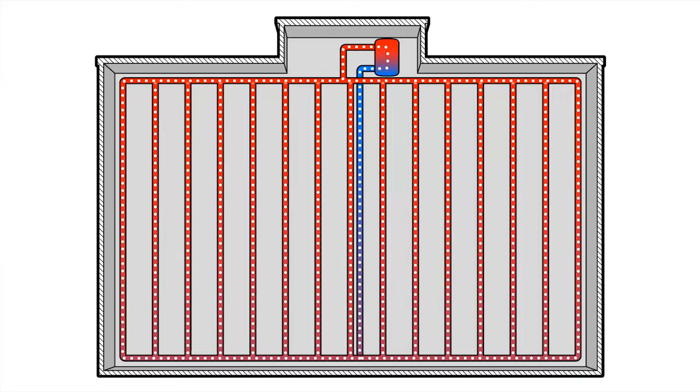Sure, okay. So this was the recirculating system that I was trying to explain. This is a typical building layout where the hot water up top is the tank, and the hot water distributes on a main header on the top floor, then goes down and feeds all the units, kitchens and bathrooms. At the end, on the lower floor, the hot water collects again and gets pulled back up into the boiler room where it gets reheated and sent on the way. So you can see this is a circle, and the water is constantly moving.

The problem with that is especially the smaller diameter pipes. A building has bigger pipes on top, and as the riser goes down further it gets smaller. The smaller diameter pipe is where the pinholes usually start. The reason is the same volume of water has to go through a half-inch pipe as goes through the top, so the velocity is much higher on a small diameter pipe than in big ones. That said, the erosion only starts on the smaller pipes, but it keeps going up.

If you keep waiting and keep patching the pinhole leaks, you will run into more issues along the way. The pinholes start getting bigger faster just because the wall thickness of the pipe is constantly decreasing, to a point where, technically, we've seen it before, you could pinch the pipe with your thumb. So this is the recirculating system.

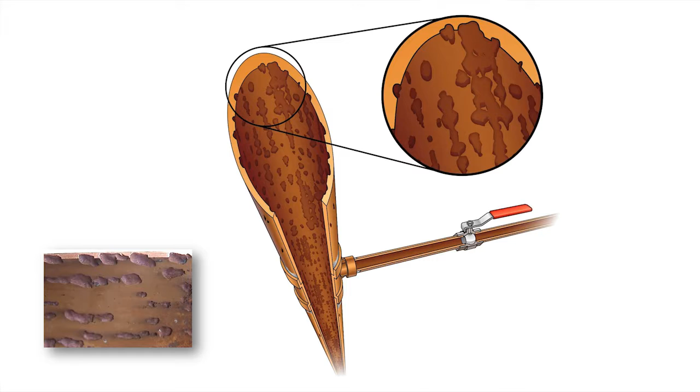And this is the pitting that I was talking about. This is how erosion looks like. We have pipe samples outside also that you can take a look at. It's not even erosion — water creates turbulence within the pipe, so some areas are affected more than others.

This is the velocity of the water, and also poor workmanship in some cases, which also affects the cold water.

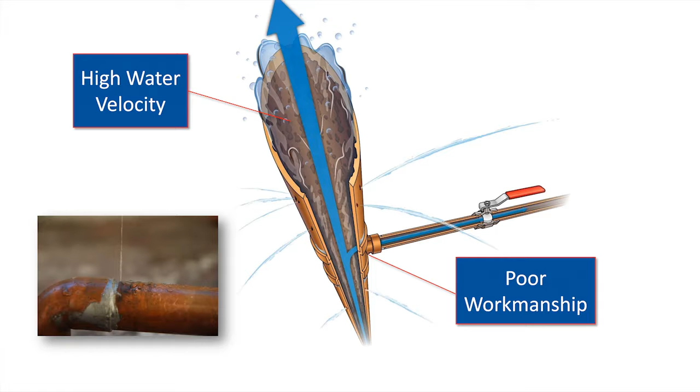If something is being soldered, a connection, you need acid in order for the solder process to work properly. This acid has to usually be wiped off. Sometimes it doesn't get wiped off, so it stays there, and since it is an acid, it corrodes the pipe from outside in. So poor workmanship is also a factor.

It's not as bad as the velocity of the pipe. That's the major cause number one for pinhole leaks.

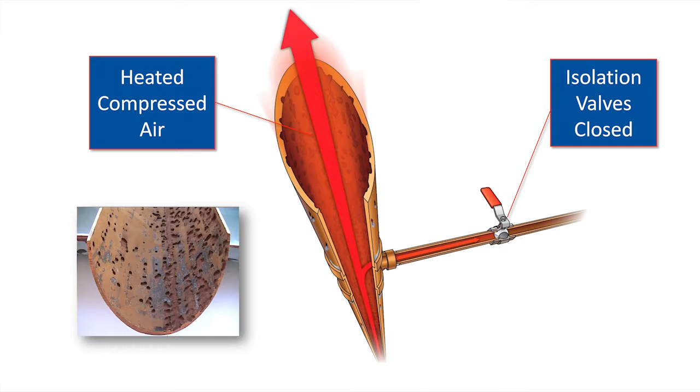This is the process created. Here you see the hot compressed air, how we clean the pipes and how the pipe is being heated up for the process. The epoxy needs a certain temperature to react properly.

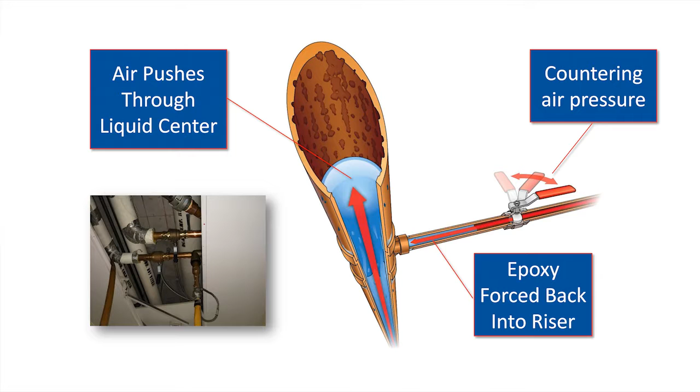Then the air is pushed through the pipe, always going from the small diameter to the big diameter where the epoxy is applied. The epoxy gets pushed through on one end, on the bottom in this case, until it comes out on the top. That way it's ensured that everything is 100% coated.

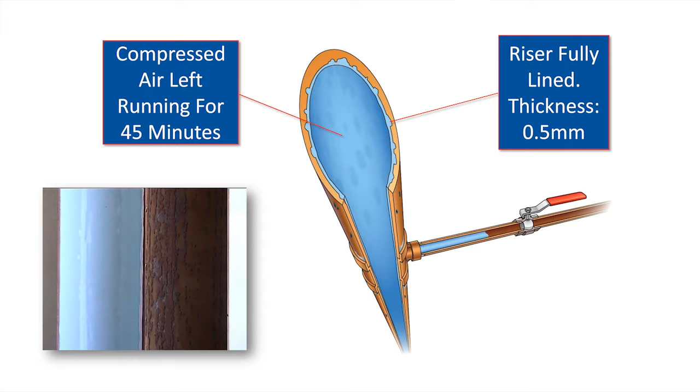After the coating is done, there's a 45 minute running time to make sure the epoxy is tacky enough to stick without any air. Then the air is shut off, and the next morning the water is turned on, and you have a new pipe within the old pipe.

The warranty, compared to a new copper pipe, is much longer. The warranty for lined pipes is 25 years. With new copper pipe, you get probably like 2 years maybe.

There are issues when there are, for example, galvanized pipes in some buildings, really old buildings. Those pipes need to be replaced. Lining just doesn't make sense. It would cost too much because galvanized pipes start rusting.

In order to get the rust out, it takes double the amount of time than it would to line copper pipes. So I would always suggest 100% that if there is rust in the pipe, if you have rusty pipes, if you have galvanized pipes, they need to be replaced into copper pipes. Or these days, PEX pipes, plastic pipes, are big as well, and the warranty is much better too.

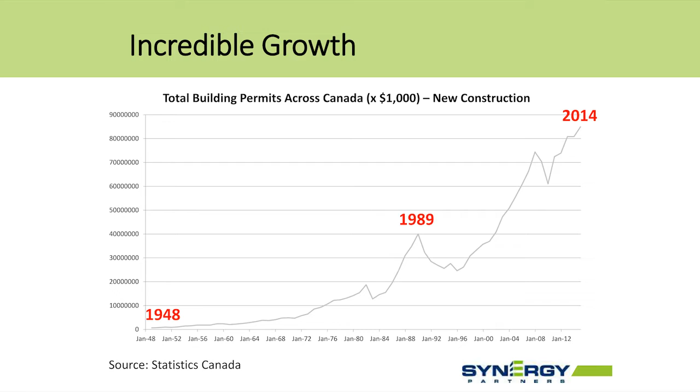Not only the stuff turning 25, but the older stuff where we're starting to run into problems which we really haven't seen as part of the mainstay of building repairs. There's your roofing, plumbing work, boilers, all that regular stuff. But then there's another whole group of things that are going to need to be done to these older buildings. So keep that in the back of your mind as we go through the presentation.

A couple of the deterioration mechanisms we're going to really focus on today are corrosion and freeze-thaw. There's obviously a whole slew of mechanisms in which a building or building components can fail and deteriorate, but we're going to focus on these first two: corrosion and freeze-thaw.

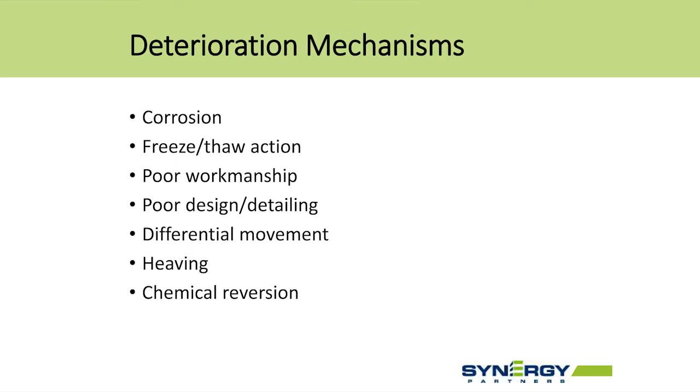One of the premises you just have to keep in the back of your mind - I think everybody knows this - is that steel rusts. I know it's not terribly new to you, but it's a phenomenon we have to deal with on a daily basis. There's a whole chemical process, but basically you need iron, water, and oxygen to cause rust - going back to high school chemistry, if you will.

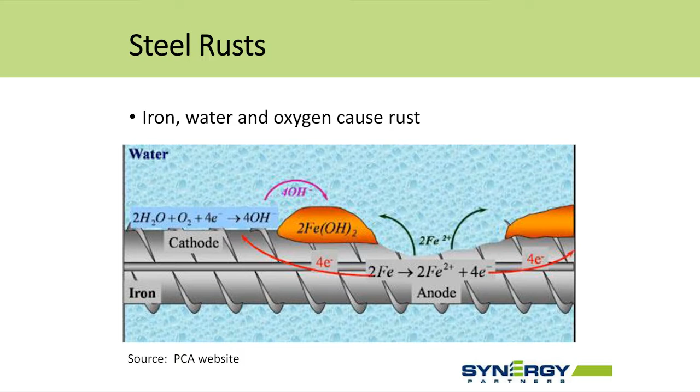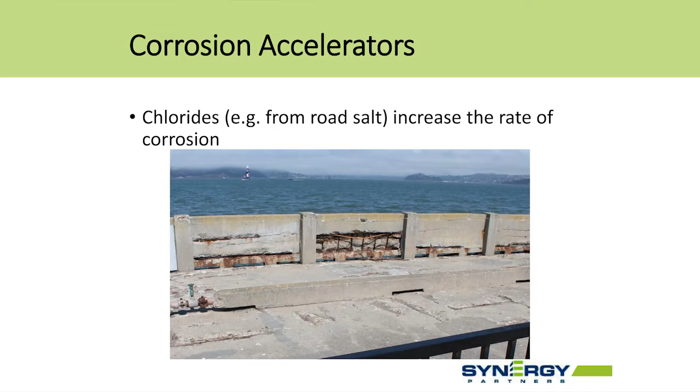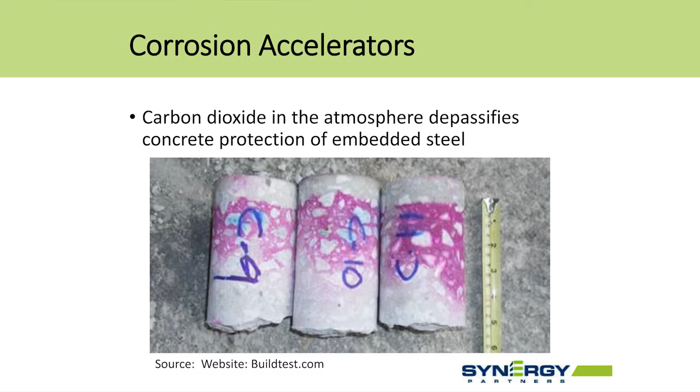Another process that you might not be so familiar with is something called carbonation. This is where carbon dioxide within our atmosphere can get into concrete and depassify the natural protective cover that concrete provides on steel, causing corrosion as well. Now that's a little bit more complicated.

There's a lot of debate in the industry about how effective or how important this is and how relevant it is to the degree of corrosion. But our experience has obviously been that carbon dioxide does cause steel to become depassified in concrete.

So what that means is that the steel within concrete is naturally protected. I don't know if most people know that, but the inherent alkalinity of the concrete protects the steel. As soon as you turn the alkalinity to more of an acidic environment, which carbon dioxide does, it corrodes. It causes the embedded steel to corrode. That's a very important phenomenon that we need to be aware of.

One of the results of corrosion is obviously a loss of structural capacity. You're starting to lose section loss. But another interesting fact is that steel expands and increases in volume by about 10 times. That expansive rust formation, as it's growing, can impart loads on the structure that were totally not intended. Engineers are not designing for steel that's going to corrode.

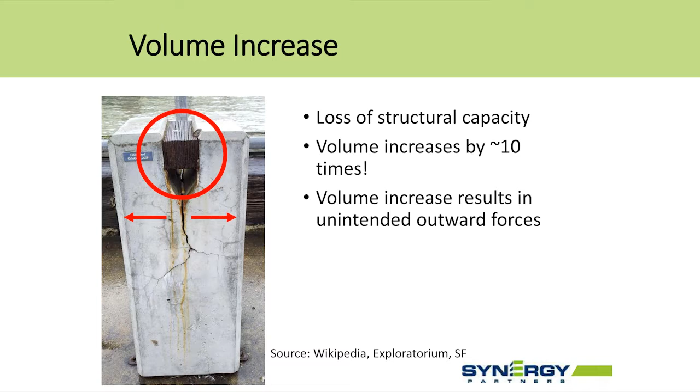They're designing for the steel as if it's going to be maintained. So it can have all sorts of effects on the building structure.

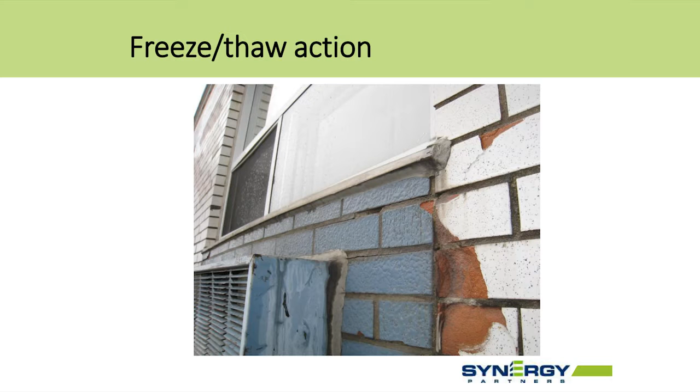And then freeze-thaw action. In this northern American environment, we have freezing temperatures and warm temperatures, and that constant freeze-thaw cycle leads to some fairly significant deterioration. We've all seen some brick spalling and mortar joint deterioration as well.

So that's just trying to give you a little bit of a backdrop so that we can move into some examples now to show you some specifics on buildings that I've had the opportunity of working on.

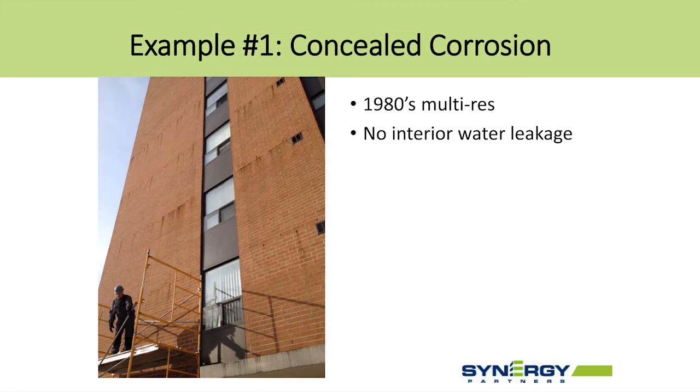So the first example here is a 1980s multi-res building, with no indications of water leakage on the interior. Nothing more than the staining that can be seen at the floor slab levels. This is actually rust staining coming out from the floor slabs, and it's very easy to walk past this.

Subsequent to a review, it was recommended to do some further investigation and some openings in the walls. What you find after doing some openings is that the embedded steel shelf angles are in fact corroded, to the point where they are starting to lose structural capacity.

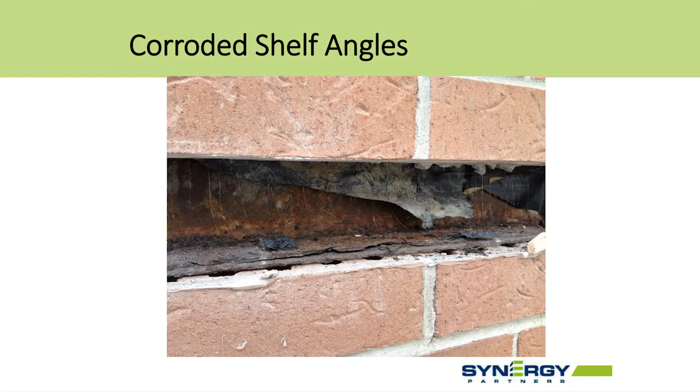If I just go back to this photo, the design of this wall structure is such that these panels are supposed to be individually supported. Each brick panel is supposed to be supported by a shelf angle, and then the next panel down is supported by a shelf angle, and the next panel down is supported by a shelf angle.

But as soon as you start to lose structural load-bearing capacity on those shelf angles, all of these bricks start to load up and stack. All of a sudden you get unintended loads coming down. So all the loads being taken by this bottom panel are significantly increased, because now it's starting to support loads from upper panels.

So it's very important to make sure that doesn't happen. If you start to get those stacking effects or loads being compounded within your wall assembly, you will have other issues such as cracking, spalling. You can have brick panels that start to bow and come loose. It's important to get that looked at.

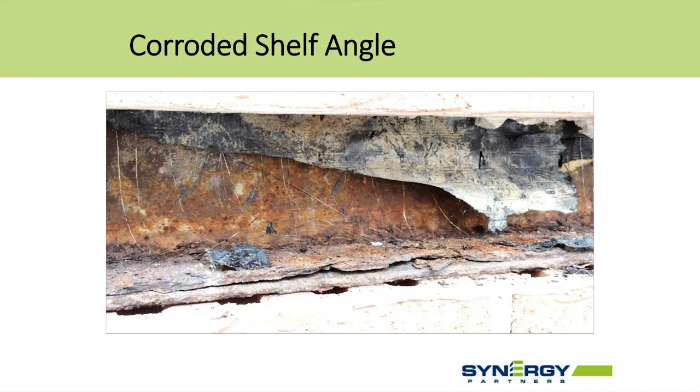I just got a slightly better picture of the amount of corrosion that's happening within this wall assembly, and it is fairly significant. So, what's the solution there for that building?

Well, the first thing to do is to check to see whether there's a stacking effect going on with the brick panels. If that's the case, then you have to be very careful in relieving those loads. You want to return the loads back to the shelf angles. In order to do that, in some cases, you'll have to replace shelf angles. In other cases, if the corrosion is not that bad and there's still enough structural strength within the shelf angle, it can be cleaned.

So it can be cleaned. Ultimately, those walls are designed for water to get past the brick, so you want to provide a mechanism for that water to get out. At the bottom, you want to protect that shelf angle and allow the water to get out, instead of sitting

on the steel shelf angle and corroding. But if they're corroded past their structural capacity, you're going to have to replace them. Yeah.

You do it in sections, yes, and you shore up the panel. I'll add, it's an expensive process. We have one in Halifax that's underway, starting in a couple of years, and it's about $400,000 to do all the shelf angles for the whole building. So quite an expensive process. You start at the top and you work your way down, relieving the load on the bottom panels.

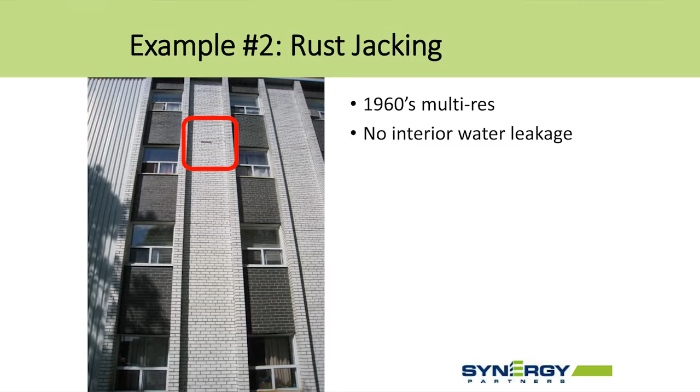Good. Okay, let's move on to a second example here. This is a 1960s multi-res building. Similar situation where there's no really apparent issues. Walking around the outside of the building, you really don't see a lot. There's one brick spall, no reports of leakage. And when you start to take a closer look at the upper floors in this same building, there's rust jacking going on.

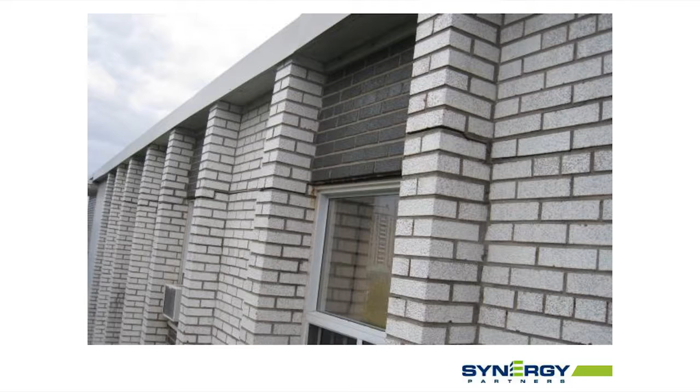As I said, when steel corrodes, it expands in volume and can cause a jacking effect, imparting an expansive load. In this case, there's a shelf angle running along here, and it is corroded to the point where it is jacking up the walls above it. This hasn't been opened up and investigated as yet, but there's definitely something going on that's concealed there. It needs to be opened up, check the load, check the condition of the steel shelf angle, and then make a determination on the repair, whether the shelf angle can be cleaned.

In this case, I doubt it. It's probably going to need to be replaced. There's also going to be significant brick removal needed to access that shelf angle and restore that wall back to a vertical plane.

This is another example of an elevation on the same building, a different wall area, but similar. Water is obviously getting into these shelf angles and causing them to corrode. This was taken with a zoom lens, and from grade, this was actually more apparent than the other shot I just showed. Keep an eye out for this sort of vertical differential movement - you can see a gap forming just above where the shelf angle is. That's an indication of rust jacking going on at this building.

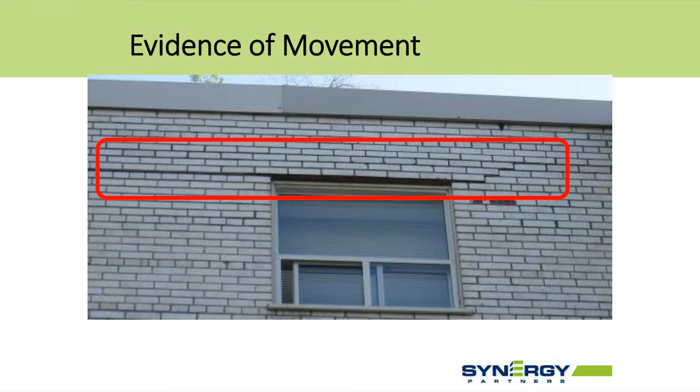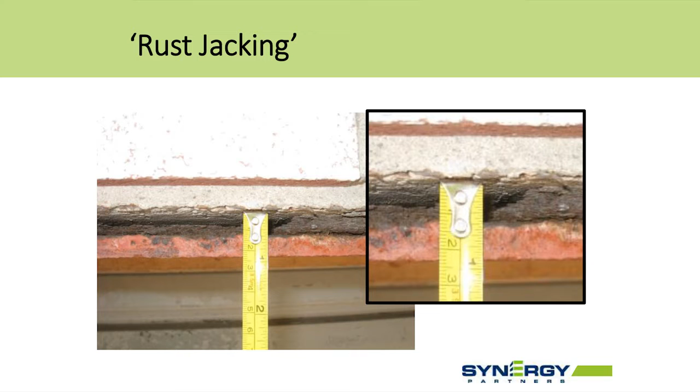This is a shelf angle on the lower floors where I was able to measure some of the rust jacking going on. You can see there's about half an inch, or about 12 millimeters, of rust formed on the top surface of that shelf angle. With 12 millimeters, using a 1 to 10 factor, there's approximately 1 millimeter of loss of section estimated on that shelf angle. So that 1 millimeter of the top surface of the steel has expanded in volume about 10 times, and you can see it. That whole chunk of rust forming on top is the volume increase of about 1 millimeter of steel.

It's pretty incredible. It's really neat how it grows in size like that.

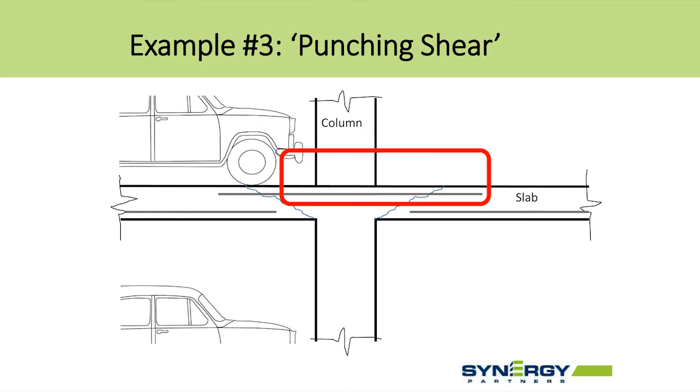All right, let's move into a garage example and a phenomenon called punching shear. When we're looking at garages, we're paying particular attention to older garages, which have a construction where there are no column capitals and no drop panels installed. You'll notice that the column in this situation comes straight up and meets into the slab. That's an older design. Typically, you won't see that type of design in newer construction.

And we have bars, we have top steel, and then we have bottom steel and slab. And obviously we have some cars parking on it here. So what we're worried about, or what's of concern, is making sure that the steel right at the column and the top surface is intact and in good shape, because that's providing a large amount of the structural load carrying capacity of the slab.

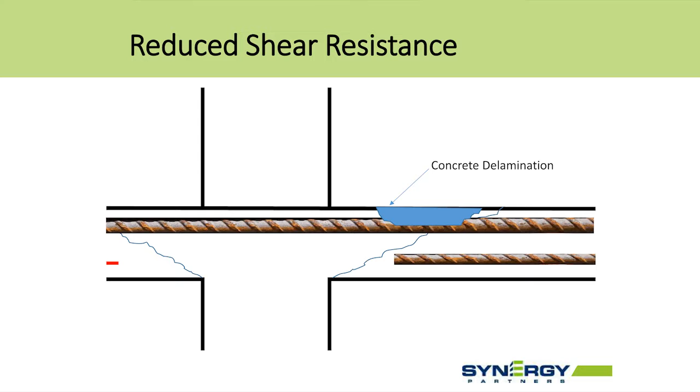And so what we're concerned about is getting a cracking phenomenon. If we start to lose capacity between that top steel and the concrete surrounding it... if you start to get concrete delaminations in this area, you start to lose structural capacity very quickly. And this can lead to a phenomenon called punching shear, where the slab will not fail slowly, but it will fail abruptly and suddenly.

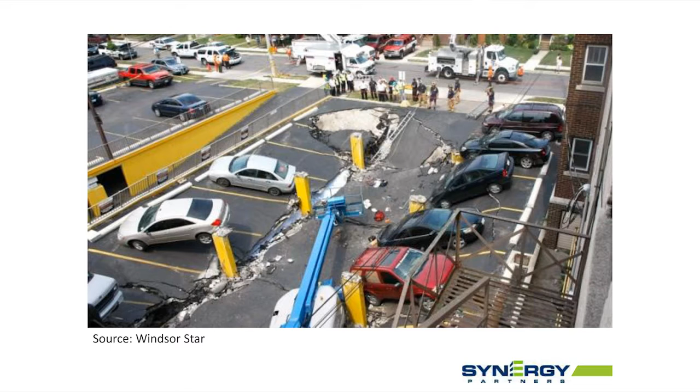I think you've probably seen some of these cases where we've had some garage slab collapses, and this is a garage that was in Windsor that collapsed, I think in 2010. As you can see, there's obviously cars parked on this roof slab. What you'll notice is that the columns remain vertical, and the slab has what's called punching shear, because the column effectively has sort of punched through the slab. That's why it's known as punching shear.

But this needs to be carefully evaluated. Older garages where there's potential for concrete delaminations, corrosion, especially on roof slabs or parking decks - not roof slabs with landscaped areas, they're of much lower risk, in the case where they haven't increased the overburden over the years. But where you have a potential for corrosion right around the column to slab interface, it has to be checked on a regular basis. You have to understand the construction, and you have to understand the risk.

And so you get very little warning with punching shear. There's not a lot of evidence. The only evidence you do see is the cracking on the top surface. And unfortunately, in most cases, the top surface is covered with some sort of waterproofing or asphalt surface that the cars are parking on, so you will not see that cracking. Would you see it from the other side though? No, because most of the cracking is on the top side. If it's gotten to the underside, you're very far gone.

Okay, example number 4. I've got to get hustling here. Anybody recognize the Algo Center Mall?

Another corrosion issue. If anybody's read the commissioner's report, a phenomenal amount of work went into investigating the cause of the collapse and all the investigation work that happened leading up to it. It's amazing how many engineers, contractors, and owners were involved. But really, this is a case where there was obvious leakage, obvious problems on the inside of the building that were just ignored for years and years and years. And there wasn't an adequate amount of attention put on the concealed deterioration that was going on.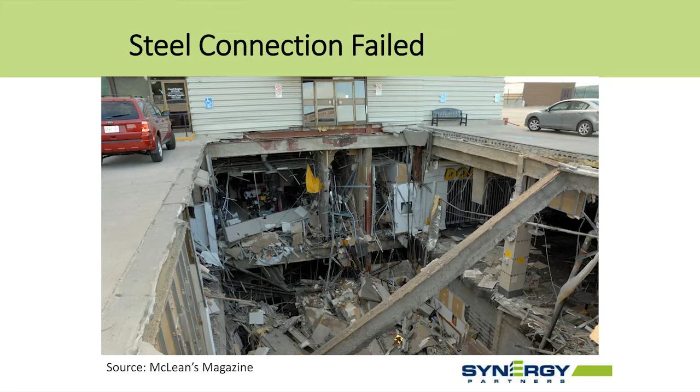And it was just corrosion. It was as simple as a parking roof deck, cars bringing in road salt, leakage over the course of multiple years. There's debate and arguments over whether the design was inherently flawed, but regardless of that, there was ongoing concealed corrosion for decades, and it resulted in a massive failure. It's something that could have easily been prevented.

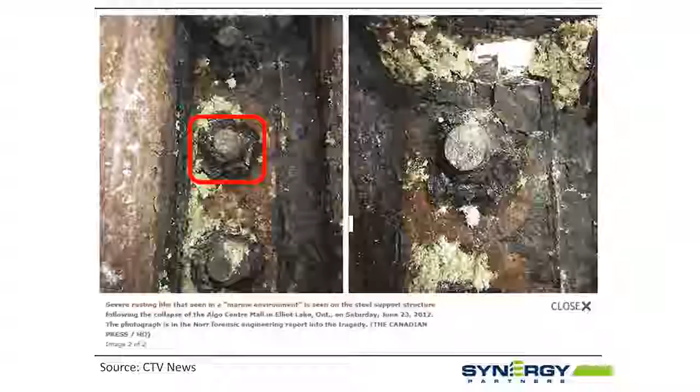And this is a shot from the bracket, or a similar one - this is an adjacent bracket, I believe, between a beam to column interface, and they associated the amount of corrosion with something similar to a marine environment. They said it was phenomenal how much corrosion was there. Really unfortunate circumstance. Okay, let's move on to something a little bit different.

There's something called Kitec piping in the industry, which we're starting to see in newer construction.

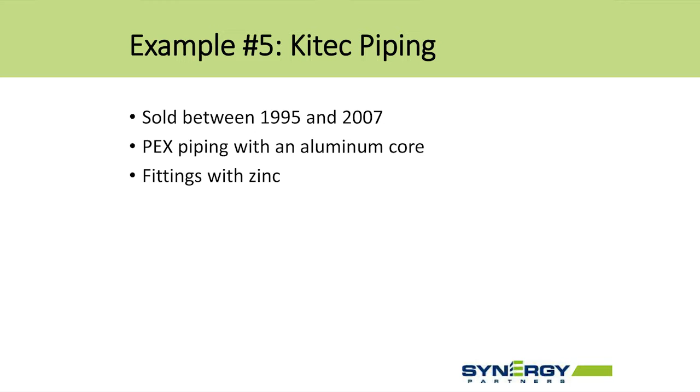You're not going to see it in the 1970s and 80s buildings, but it was sold between about 1995 and 2007. Kitec piping is a form of PEX piping, but it has an aluminum core. If you look at the cross-section of the pipe, there's an aluminum core embedded in the middle between the PEX. You can also identify it by the stamps on the fittings where it says Kitec.

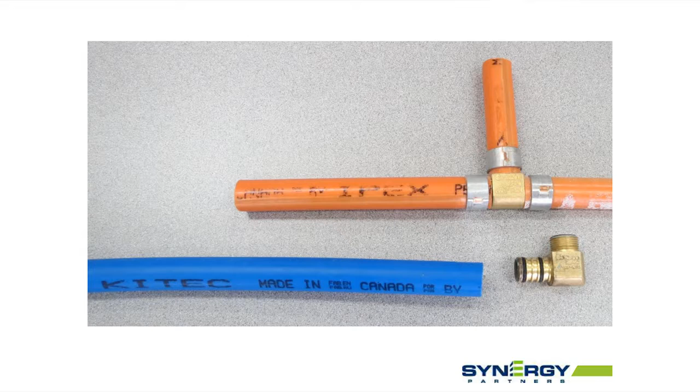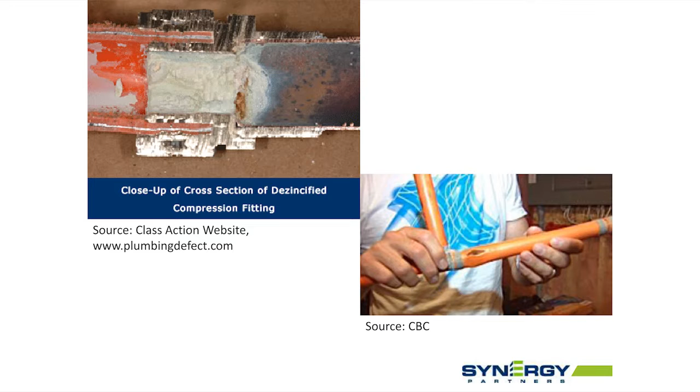The problem with Kitec is that there's a class action lawsuit out against it, because there's a problem with the fittings. There's an interaction between the aluminum, the PEX, and the zinc in the fittings, which contain a high content of zinc, causing something called dezincification. That results in a product being formed within the pipe, expansive, another one of these unintended consequences, and it causes bursting of the pipe. You just can't predict when it's going to happen.

It's not that old. It was only sold between 95 and 2007. There was a class action lawsuit that was settled, and there's a fund available for anybody that has Kitec and decides to change the piping within their building.

So what we're seeing now is a slew of primarily condos that were built with this piping going through the process of having to replace it. They're replacing it mainly for insurance reasons, because once they get a leak, insurance companies say, hey, we're not going to insure you because we know you have a problem. The industry knows it's a problem, you know you have a problem, and so we're going to force you—we're not going to insure you if you maintain this piping.

It's become a big issue, becoming a bigger and bigger issue in the marketplace. It's primarily focused on condos right now, but if you are looking at any new developments, or have some new developments within your portfolio for multi-res, this is something you want to definitely be aware of.

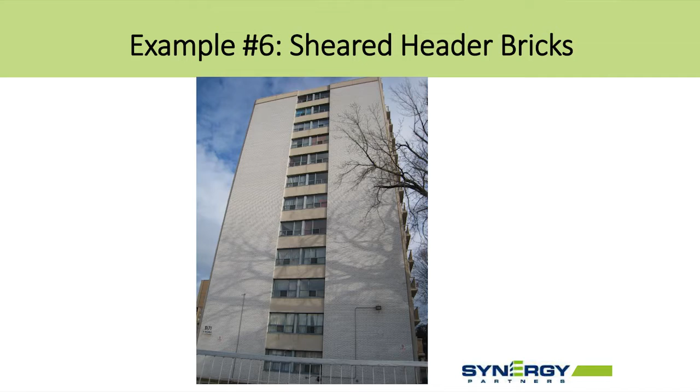We'll go back into another wall example here, and this is an example of sheared header bricks. A header brick is—I'm going to have to blow through some of these here—a header brick is where they're using the face brick, turning every 6 courses at 90 degrees to connect back in, to provide a lateral connection of the face brick with the backup concrete block wall. So this is what forms your wall structure, a combination of the face brick and the concrete block backup.

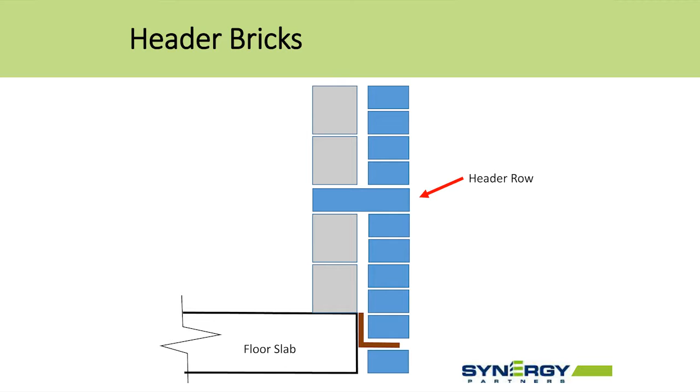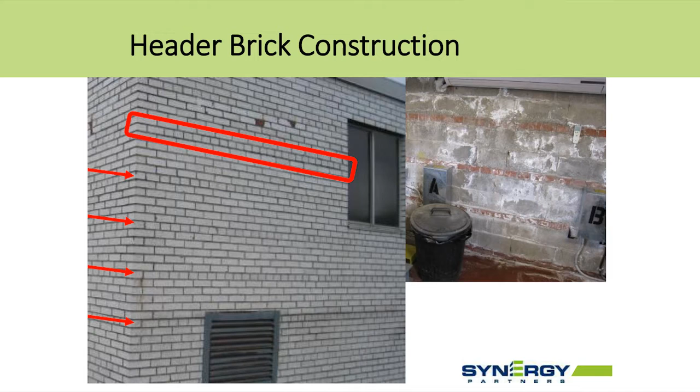No longer used, there are inherent problems with the design, but you still find it in older buildings, sort of 1970s vintage, but not typically later than that.

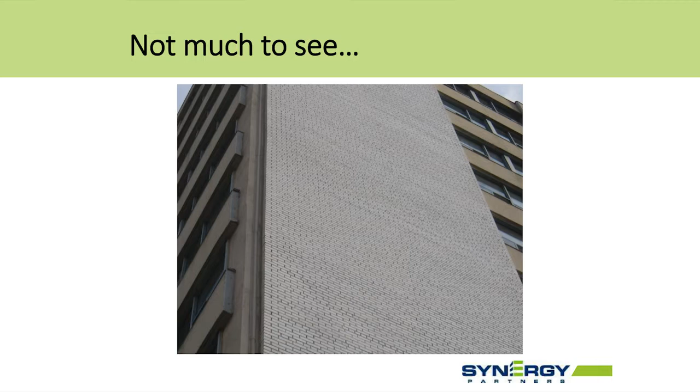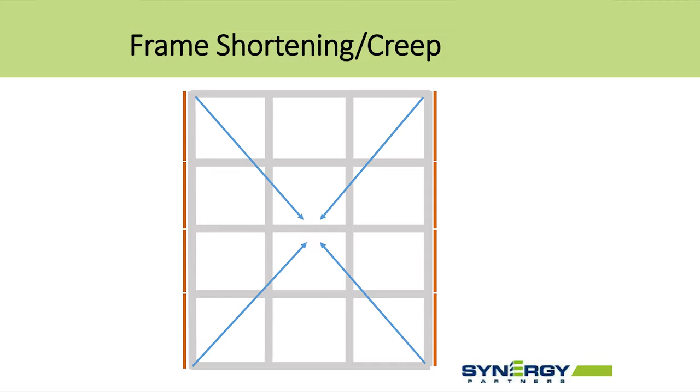So here's an example of a building on Eglinton—this is the north elevation. You look up at this wall assembly and you really don't see much going on. But over the years you get shrinkage of the concrete frame, which imparts stresses on those headers and causes them to shear. As the frame of the building shrinks, a very slow, small process, you get differential movement between the face brick and the block. Because the bricks are not strong in shear, they just shear.

So it looks like they look good—looking at the bricks from the outside, you know, they look fine. But there's no way of telling whether these header bricks are intact and remain so. This is the building on Eglinton, which had, I guess, 4 panels fall off. This happened earlier this year, about 2 or 3 months ago, and it hit the news.

So again, you need to be aware. It's definitely an invisible issue, something inherent to this type of construction. If you have it, it should be monitored and investigated. You have to do some openings to see if those header bricks are still intact.

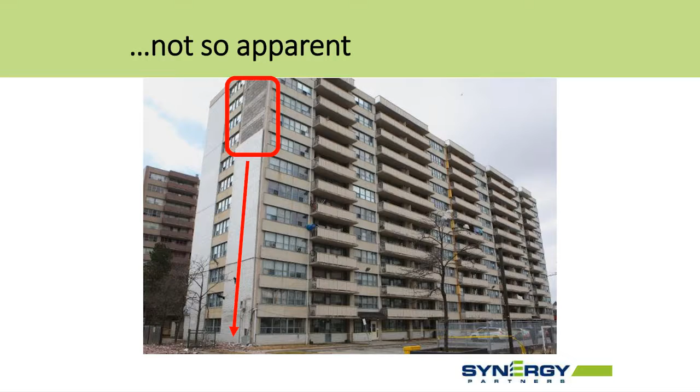Today, in more modern construction, the lateral connection is provided with a little piece of metal which is flexible, so it can absorb some vertical movement and still provide that lateral securement, which is critical.

I'm not trying to show you the detriment or these extreme examples, but it gets the point across. I hope I'm not coming across as showing all the bad stuff, but these are the risks, and keep in mind the building stock in Canada is getting older. We have a lot of these older buildings, a lot of these issues. As long as they're continuously reviewed, maintained, and understood, they can be managed. There are ways of managing this type of construction.

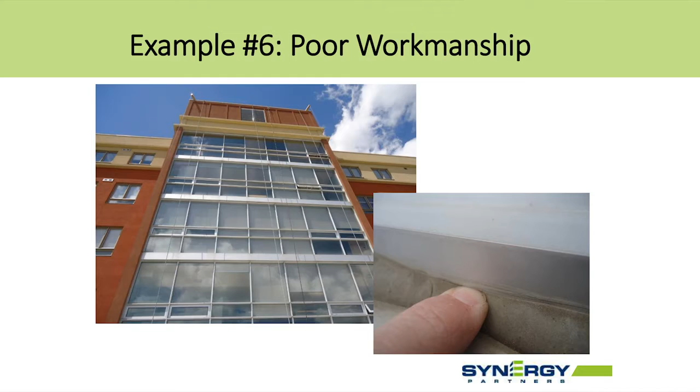Here's an example of some poor workmanship. As you can tell, this is a newer building, newer construction. Looking at it, even looking closely at the sealant work, you know what, it looks pretty good. It's intact, it's got a nice profile. But when you look at it a little closer and start to stick your finger into it, you realize it's not very well installed.

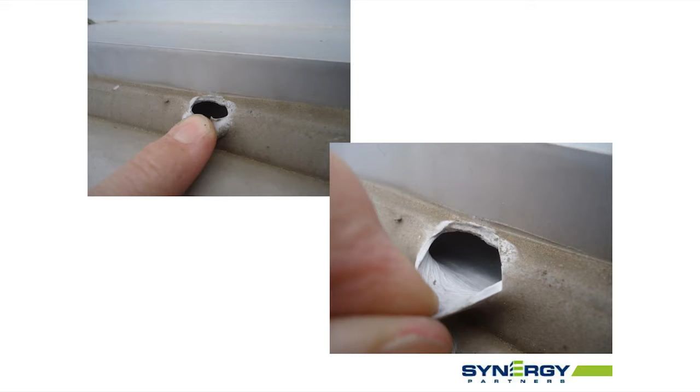I've run across a number of buildings now where this is the case, and the sealant is just barely bonded onto the window frames by probably a millimeter or two. It's very, very minimal. So it's easy to walk past something like that. You look at the windows, new application, new installation, and think, wow, this is great, this looks really good.

Stick your finger in it, and lo and behold, very little bond onto the substrate, and really very little material. I'm not even sure how they applied it with nothing behind. I don't know why there's a big gap behind the window frame as well. But obviously this is not right, and this is an example of poor workmanship.

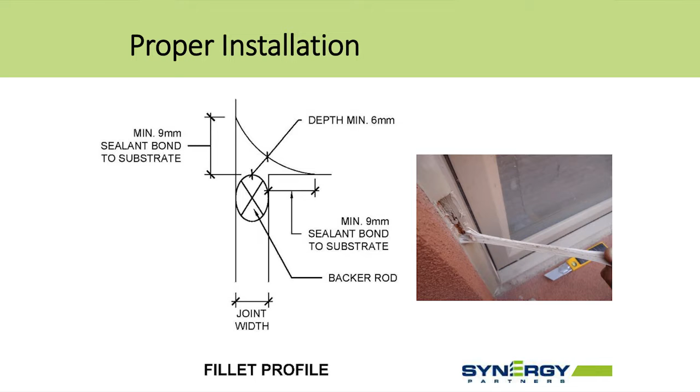Looking at a proper detail, there should be a minimum of 9 millimeters of bond. We're looking at a sealant profile that's got maybe 2 millimeters, and 9 millimeters is the minimum, so it's really short. You're not going to see a typical service life out of that sealant—it's not going to last 15 to 20 years as it should. We've seen buildings where it's led to systemic, chronic leakage within 5 years. This is a common issue in new construction.

Here's an example of some new sealant being applied, doing a pull test on it to check the bond, making sure it's installed properly, the profile is correct, and there's enough material installed. It's easy for a contractor to put a lot less material—it saves a lot of money and time.

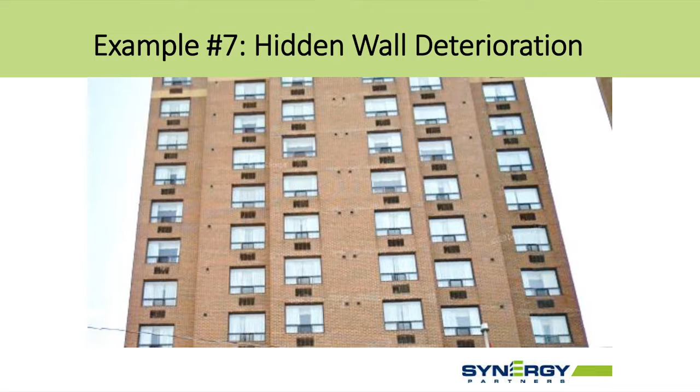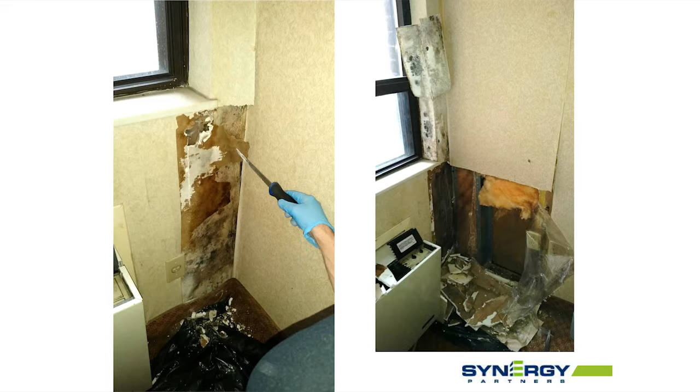So back to this fancy building here, another example where it's easy to walk past. There were some indications of water leakage on the interior, and I'll go through what resulted. This has wallpaper on the outside walls, and as soon as you start to peel up the wallpaper, that's mold. Within the wall assembly, there's mold on the back face of the drywall, and they are getting leakage, but it's been ongoing for a long time, and this isn't just in one unit.

This is something throughout the building—it's a systemic issue. There are systemic issues with the window construction and age, and also with the sleeves for the PTAC units. Within the wall assemblies as well, there's corrosion. In this case, this is a steel stud backup, whereas the other wall we were talking about had a concrete block backup.

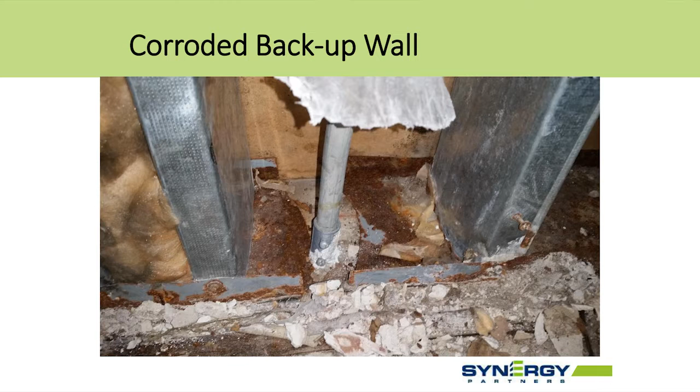A lot of buildings built starting in the 80s used steel stud backup and drywall interface, then an airspace, then the brick veneer. Buildings in the 80s were known for this new construction technique, and they were not well designed. The outer gypsum board was paper-faced, prone to getting wet, and as soon as gypsum board gets wet, it just starts to turn to mush. It's also prone to mold.

The steel studs, if they get wet, tend to corrode out. They are a structural element to the wall, so as soon as they start to corrode, you lose that lateral support again—you're losing support for your bricks, losing that lateral support for the whole wall assembly.

And so it turns into a much bigger issue very quickly. But this is all kind of concealed, tucked in the walls. When you have steel stud backup wall construction in your buildings, we always recommend doing some periodic testing.

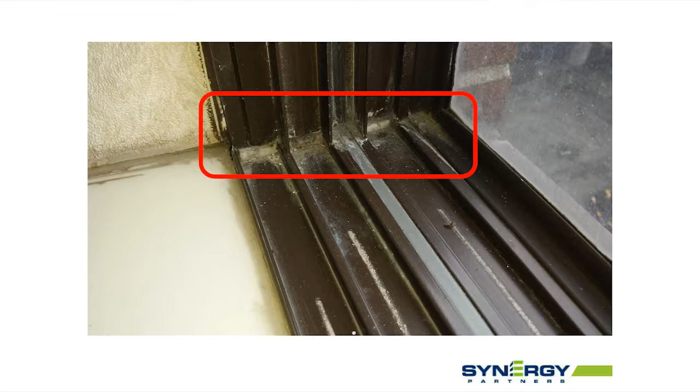Areas that are particularly problematic are around window corners. As you can see in this first photo, there are little foam gaskets used to make the joint between the horizontal sill and the vertical mullion of the window, and those fail after a while. So after 20 years of service, water that comes into the sill that's intended to drain out is getting caught in that corner, going through the corners of the window frames, and right into the wall assembly.

Yeah, about 1 minute left. Okay, I got to go. Okay.

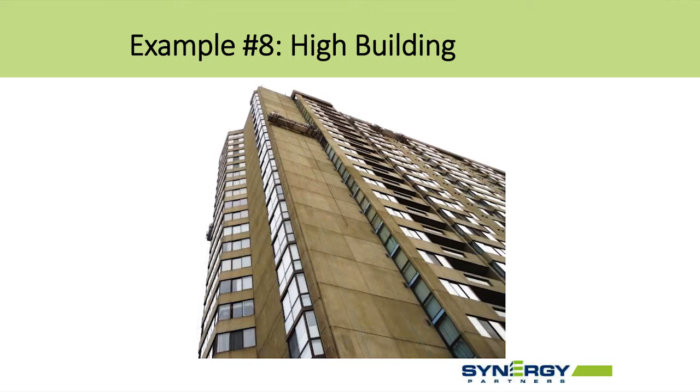Let's just maybe, I'm almost done actually.

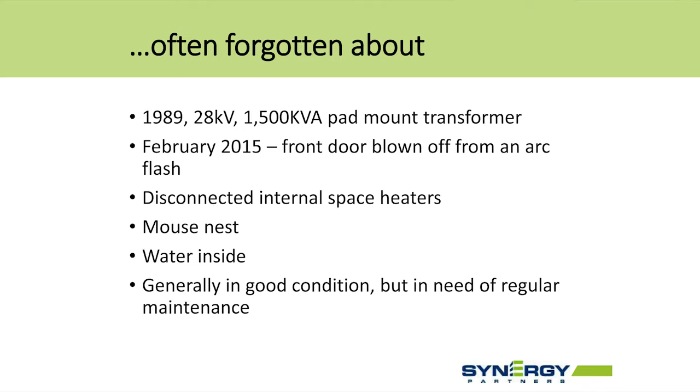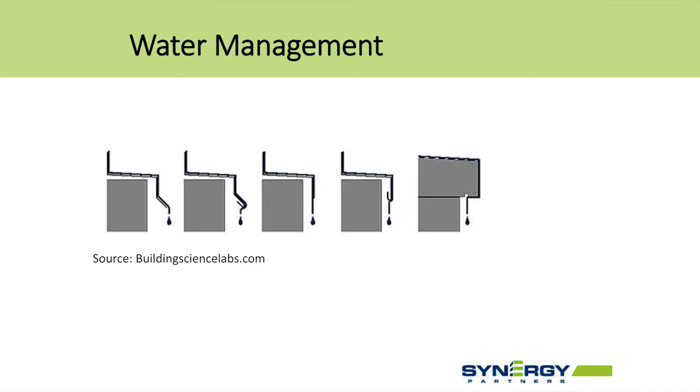There's a great little study done by Building Science Labs. It talks about the effectiveness of drip edges, and believe it or not, there's different performance based on different profiling of a drip edge. I'd be happy just to see any drip edge, but you can get better performance depending on how you design it. So think about doing a walk around your properties, after a rainfall or during a rainfall, and see how water is hitting the walls, how it's getting kicked away, where it's going, what's going on.

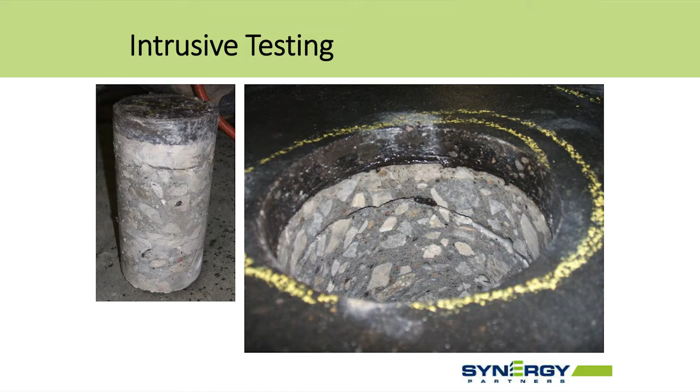It's really powerful. Intrusive testing is going to be a must, just part of our norm. In this case, you can see a concrete slab that sounds great, looks great, the mastic is in great shape. As soon as you do a core, there's clearly a concrete delamination buried beneath the top surface that you won't be able to detect with a chain drag survey or a hammer. In some cases, you just got to get in there, do some openings, do some coring, and try to identify those concealed conditions. It's a matter of understanding the construction, understanding the risks, and determining an appropriate review plan.

So I think that's it, Martin.

Thanks. John has asked me to make a few comments, to summarize some of the stuff from a landlord perspective, because Realstar manages about 200 buildings across the country, and we deal with a lot of these problems on a day-to-day and yearly basis. We haven't done any pipelining yet. That's something we are studying right now, so it's a good time to have the presentation, and I'll be talking with Mark after as well.

One other thing to add to what Mark talked about is it's even more economic if you have a situation where you have asbestos in a building, and the alternative we've been using in the past is changing the pipes. But when there's asbestos you have to deal with, that raises the cost by 2 or 3 times, so that makes it even more economic to do the pipelining.

The environmental issue is one that wasn't really dealt with by Sean and Sam either, but it's one we deal with quite a lot. When water gets into a building, you get mold growing, very high cost, a lot of problems that flow from that. Similarly with asbestos damage, water gets in there, the asbestos is damaged, and you spend a lot of money to remediate that problem.